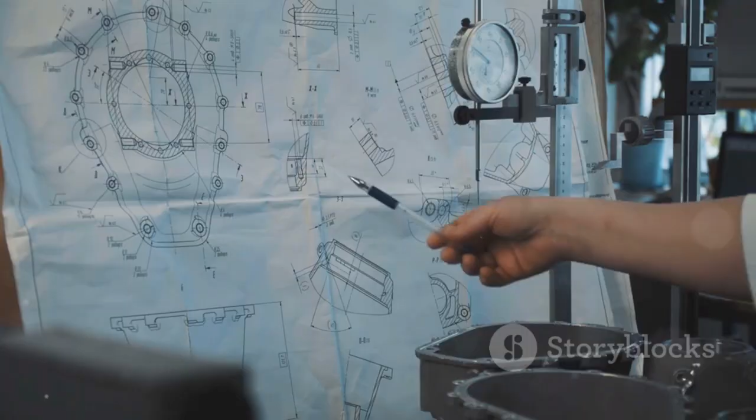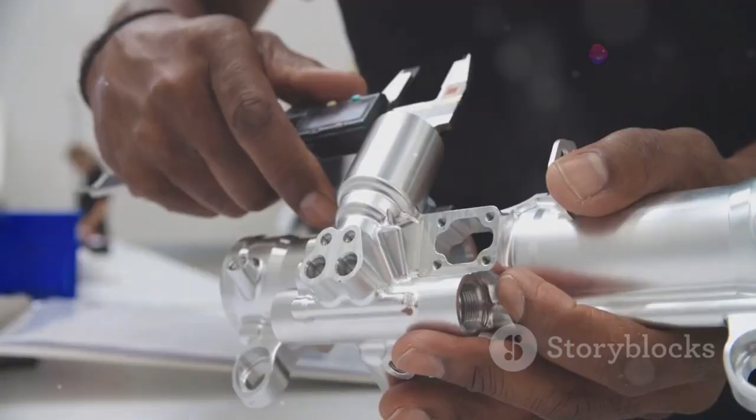I'm Yogesh, and today we're diving into a topic that's truly a matter of life and death in engineering safety: critical dimensions. Engineering drawings are more than blueprints. They're the language of making things, and some numbers on those pages are absolutely vital. These are the dimensions you cannot get wrong. If you do, the results can be catastrophic. It's not just about making parts fit, it's about making them safe.

Think of a 1mm error on a bookshelf, it's a wobble. On an airplane's landing gear, it's a disaster. That's why we have a formal system to flag these crucial measurements. A way for designers to say, pay extra attention, lives depend on it. In this video, we'll unpack what makes a dimension safety critical, how to spot them, and how to mark them so everyone is on the same page.

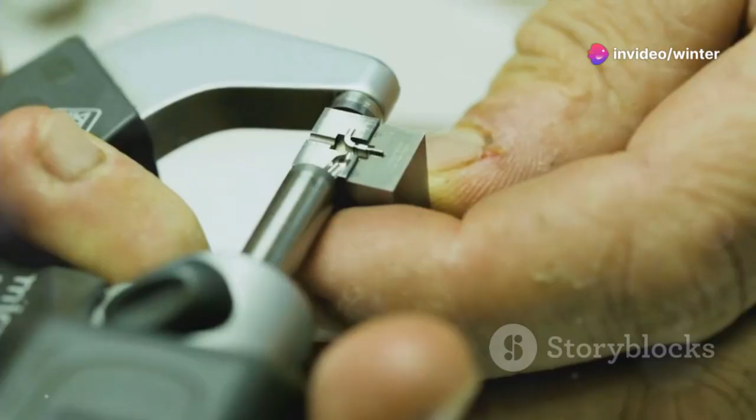This is about more than rules. It's about responsibility and precision. In engineering, the small stuff is often the big stuff. So grab your calipers, let's get started.

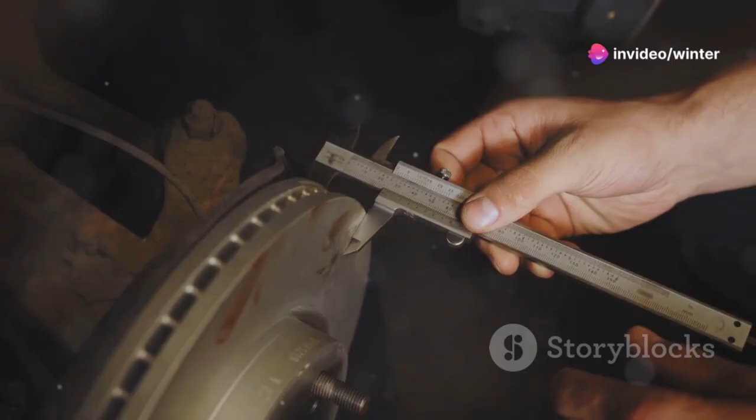So, what are safety critical dimensions? Simply put, they're measurements that, if out of tolerance, could cause failure and endanger lives. These aren't just any numbers, they're the backbone of safe design. For example, in cars, the thickness of a brake rotor is safety critical. Too thin, and brakes can fail. The diameter of a bolt hole in a steering knuckle? If it's too large, the bolt could shear off.

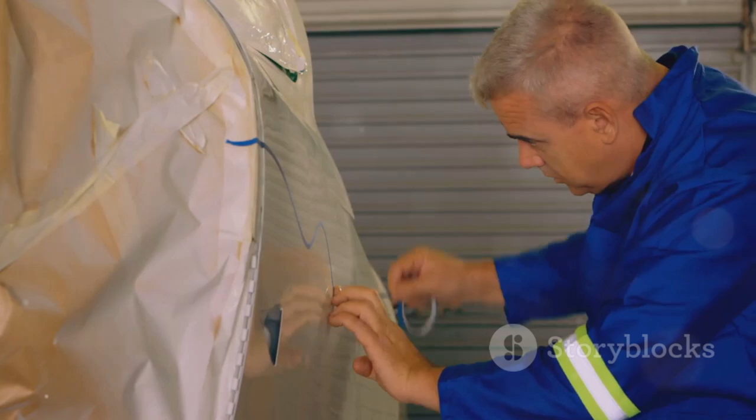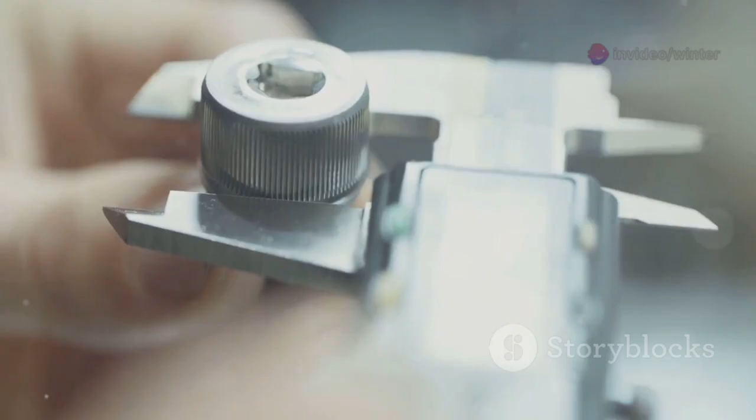In aerospace, the wall thickness of a hydraulic line or the spacing between turbine blades, if wrong, can lead to catastrophic failure. Every one of these dimensions is marked and inspected with extreme care. In medical devices, the internal diameter of a drug pump tube or the thread profile of a bone screw can mean the difference between life and death. Even a tiny error can have fatal consequences.

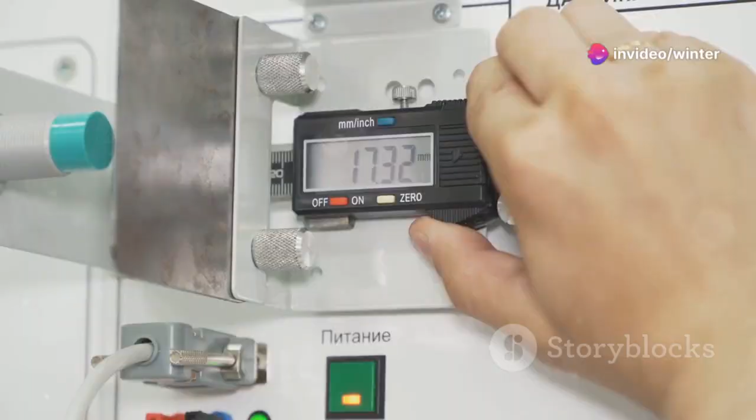These dimensions are the ones engineers lose sleep over. They're identified, marked, and checked with almost religious scrutiny. There's simply no room for error. Whether it's a car, a plane, or a medical device, safety critical dimensions are everywhere. They're the silent guardians of our designs.

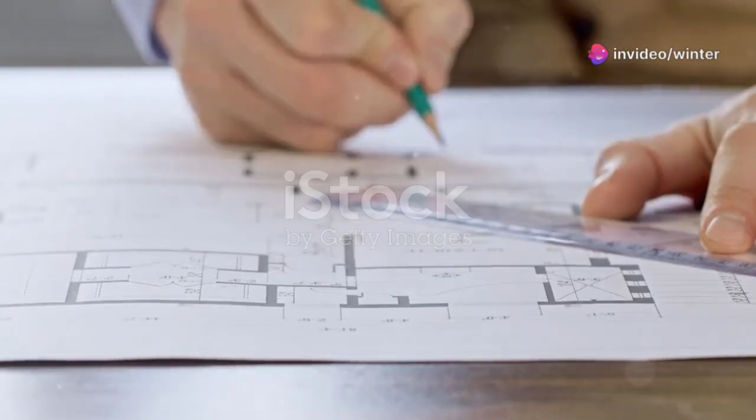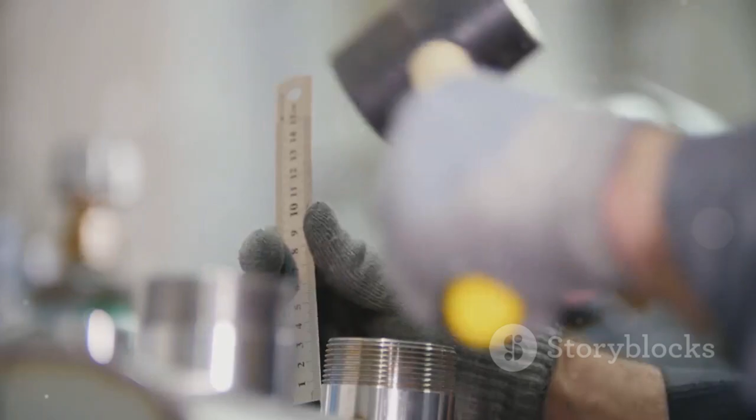Why mark safety critical dimensions? Because focus matters. A single part might have hundreds of dimensions, but not all are equally important. Marking the critical ones tells everyone, machinists, inspectors, where to focus their best efforts. It's a red flag. Handle with care. For these features, machinists use more precise tools, slow down and double-check. Inspectors know these require 100% inspection, every part, every time.

This creates traceability, so if something fails, you can track exactly what happened. Marking is also a legal and regulatory requirement in many industries. It proves you've thought through the risks and put controls in place. It's not just good practice, it's professional ethics. Marking safety critical dimensions is a cornerstone of public trust in engineering.

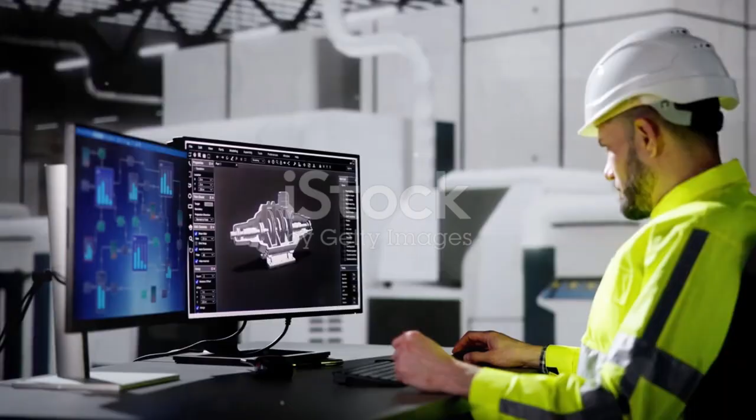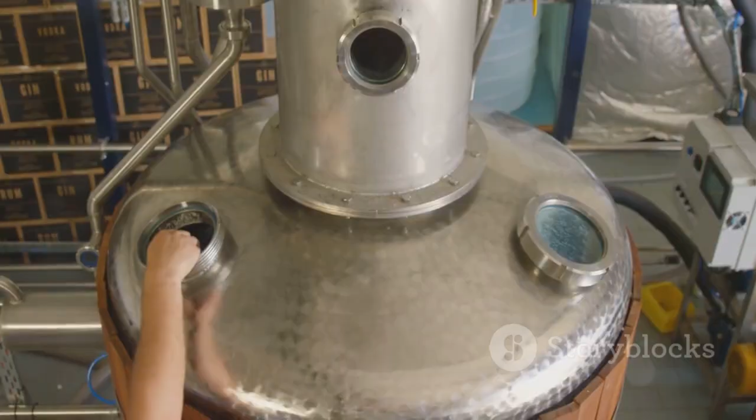How do you identify a safety critical dimension? Start with the part's function. If a feature's failure could cause the system to fail dangerously, it's critical. Look for features that bear heavy loads, like the diameter of a shaft or the wall thickness of a pressure vessel. Use tools like finite element analysis to spot high-stress areas. Assembly fit matters too: press fit pins, piston clearances. If the fit isn't right, things can fall apart or seize up.

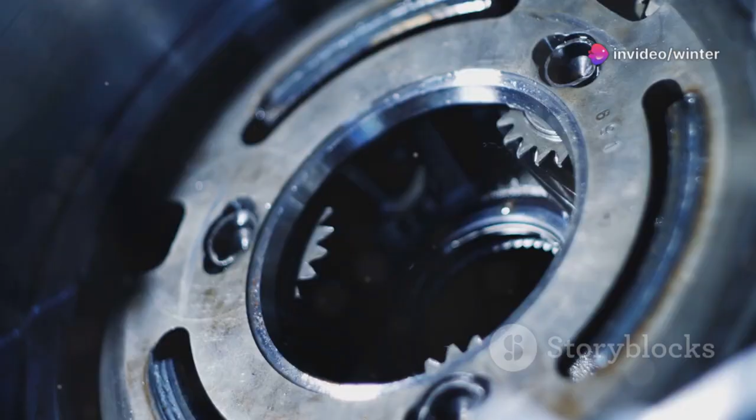Always check industry standards and historical data. Organizations like SAE and ASME have codified decades of experience. These standards often highlight which features are critical. Don't reinvent the wheel, learn from past failures. Identifying critical dimensions is detective work, blending analysis and experience. It's about asking, if this goes wrong, what's the worst that could happen? That's how you spot the numbers that matter most.

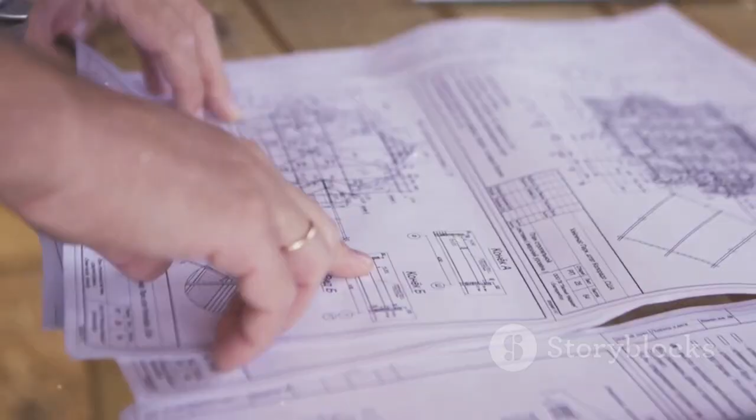Once you've found a safety critical dimension, you need to make it obvious on the drawing. Engineering uses standardized symbols, most commonly an elongated oval or stadium shape around the dimension and its tolerance. Sometimes you'll see an inverted triangle or a diamond, depending on the industry. The key is consistency and clear documentation: define your symbols in the drawing notes. Often, a note will specify critical characteristic, 100% inspection required. The symbol grabs attention. The note spells out the requirements.

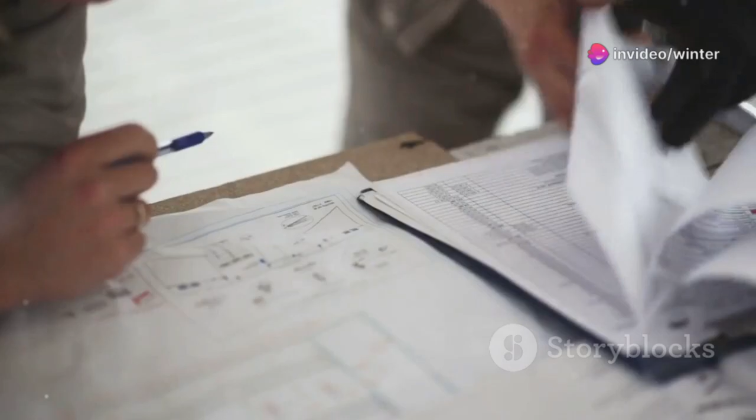Remember, the tolerance is just as important as the base number. Tight tolerances mean tight safety margins. Marking both ensures everyone knows this feature must be perfect. It's the universal language of "don't mess this up."

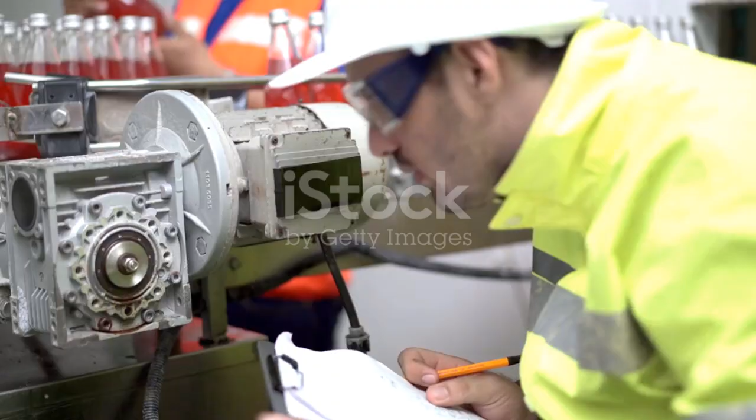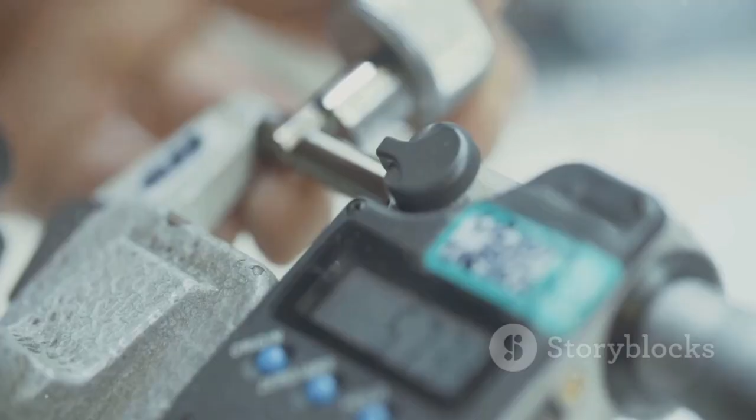Marking a dimension is just the start. Inspection is where safety is guaranteed. Safety-critical features demand 100% inspection. Every part, not just a sample. For simple features, a digital caliper or micrometer might do. For complex ones, a coordinate measuring machine, CMM, is used. CMMs create a 3D map of the part, measuring with extreme precision.

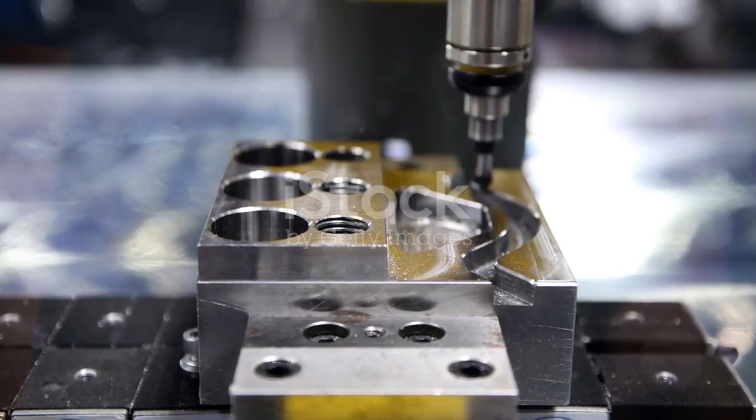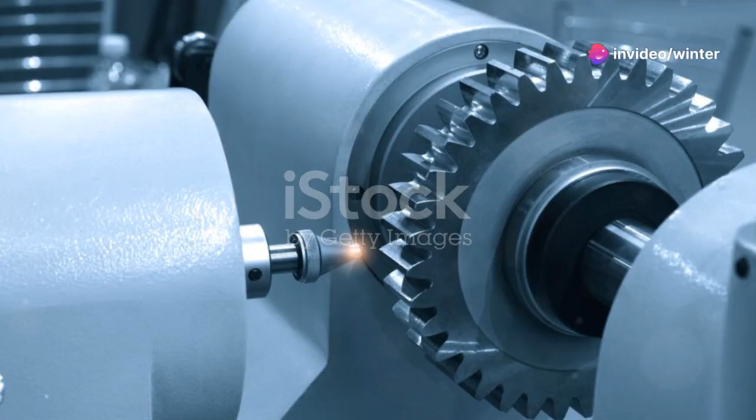Every measurement is logged, tied to the part's serial number, creating a traceable record. If a part fails years later, you can check exactly how it was made. This isn't just paperwork. It's the backbone of quality and legal compliance. Inspectors handling these features are highly trained and know what's at stake. Out-of-spec parts are quarantined and reviewed. They never move forward until deemed safe. Inspection and documentation are the firewall against defects.

Let's see how this plays out in real industries. In cars, airbag systems rely on critical dimensions for safe deployment. Wall thickness, vent hole size, all checked and x-rayed. In aerospace, even a simple bolt's core diameter and thread profile are safety critical, ensuring the plane stays together. Water treatment plants depend on valve seat and seal dimensions to prevent leaks of hazardous chemicals. In nuclear power, pipe wall thickness is monitored for decades. Any thinning is a potential disaster.

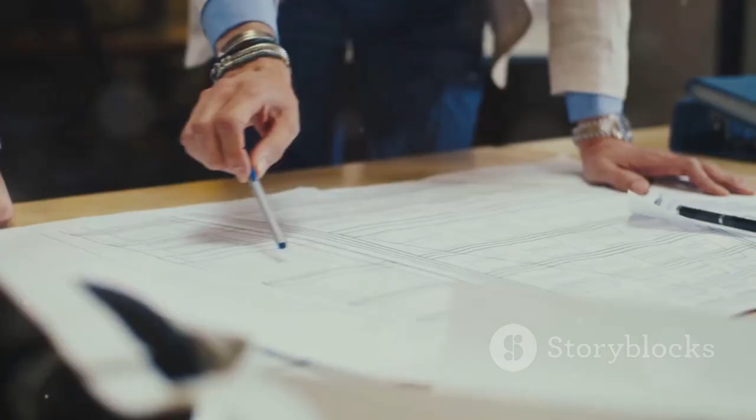Every one of these features is marked, measured, and documented. The stakes are high. Public safety depends on getting these numbers right. Across industries, the process is the same. Identify, mark, inspect, and document. It's a universal discipline. Safety-critical dimensions are everywhere, quietly keeping us safe.

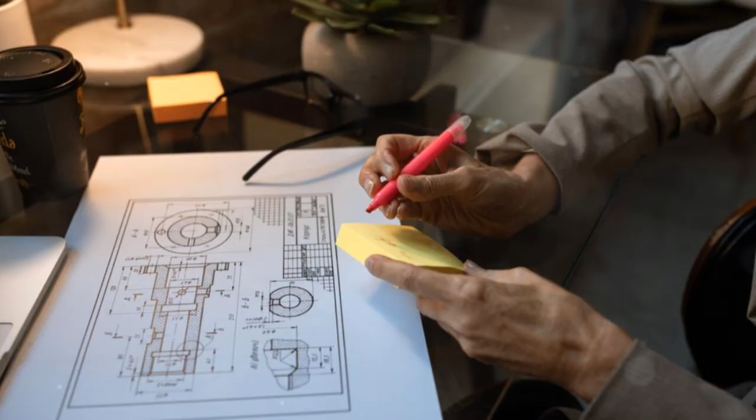To sum up, safety-critical dimensions are the unsung heroes of engineering. They're the numbers that keep our world running safely, from cars to planes to medical devices. Identifying them is a designer's duty, analyzing function, load, and fit. Marking them clearly sets the safety chain in motion. Rigorous inspection and documentation build a firewall against defects.

This is what separates professional engineering from casual making. It's a culture of quality and responsibility. By mastering this discipline, we protect lives and build trust. Every precisely marked and inspected dimension is a commitment to safety. Now, go build something great and build it safely.